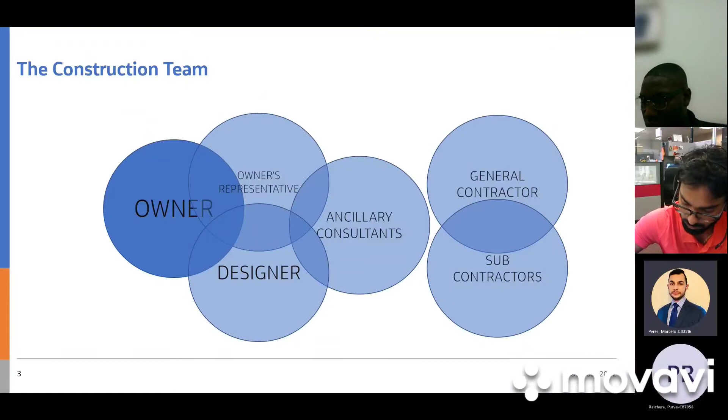There's an electrician, an IT guy, landscaper, and each of these guys is a specialized subcontractor, and the GC is just orchestrating all of them. So kind of like the owner's representative is orchestrating the whole project team, the general contractor is orchestrating all the construction team, the subcontractors.

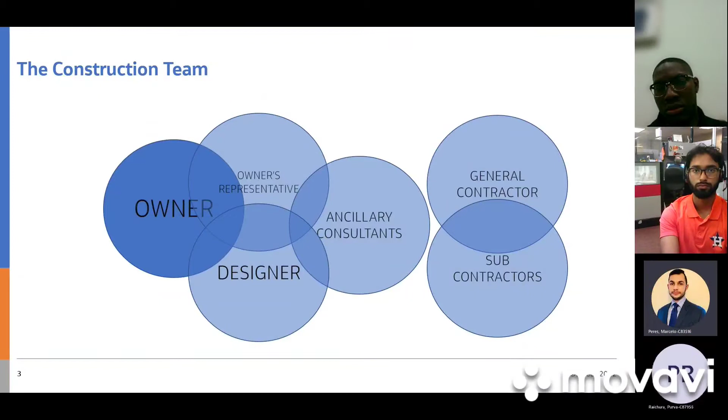Okay, so some delivery methods. There's a whole bunch of delivery methods. I'm just going to go through some of them, the most important ones, the ones that are more common in public construction. There's design-build, design-bid-build, construction manager at risk, integrated project delivery, P3, and what we call JOC, job order contracting.

And let's start with, I think just for the sake of time, I'm going to skip design-build because design-build is very straightforward. It's like when you're buying a new house from a contractor, right? One of those residential contractors. You buy that house on the plan from that residential general contractor, and he's the one designing and building the house for you, right? So you're only dealing with one person, that contractor, and he's the design-builder. He's designing and building that house for you. That's what design-build is, one person.

And then there's design-bid-build. As the name suggests, this approach has three different phases. There's the design phase, the procurement phase, which is when the owner is looking for a builder, and the construction phase. There are many pros and cons for this approach, and it would probably take us several days to discuss all of them, but here's what design-bid-build is supposed to give the owner. It's supposed to give the owner the best price for the project. Supposedly the owner gets the best price because the entire project is already designed.

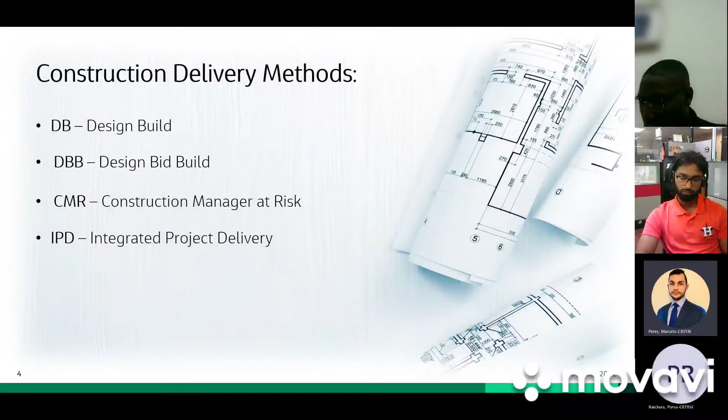So in short, this approach requires a joint contract signed between all the parties, all the entities, after the goals and objectives have been established collaboratively. And I say collaboratively because, again, these guys are all working together, all in the same boat.

And then also not very commonly used, but you will see this a lot in horizontal construction. There's what they call the 3Ps, PPP or P3. That's public-private partnership construction, 3Ps. This delivery method doesn't really have a straightforward definition, but it's basically a partnership. It's a contractual agreement between the public sector and a private sector.

So let's think of a public agency, for instance. Let's think of the Texas Department of Transportation. The Texas Department of Transportation can partner up with a private agency. And these two agencies, private and public, will collaborate with each other financially, and they will collaborate with their skills, and they will deliver a service or build a facility for the use of the general public.

These two parties, private and public, are sharing their resources, but they're also sharing the risk, the liability, and obviously the rewards. Any rewards they're sharing, right? So they're either winning together or losing together. Now, as an example, let's think about road tolls. There's a whole lot of those here in Texas, here in the Dallas area. A lot of times you see those tolls. There's a partnership between your state and a private entity.

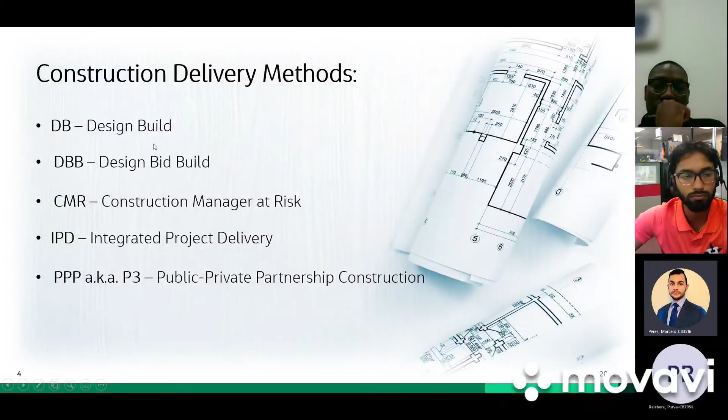So how is the project itself built on a P3, a public-private partnership? Well, this partnership can choose any of the other delivery methods that were discussed earlier, right? Let's say they want to build a highway. They can use an IPD or a CMR process or a DBB or a design-build. So they can use their partnership and adopt any of those other delivery methods.

And then there's JOC. You're going to hear this term a lot at Dallas ISD. It's generally used at a much smaller scale, sometimes with a price capped by the owner, right? A limited price. It's generally used for renovation projects or small maintenance tasks that can be easily defined by a unit cost. So the key word here is unit cost. In other words, projects that are small enough where surprises are not likely to occur.

And this is a direct contract between the owner and the general contractor or the maintenance contractor. And how does it work? The owner and the contractors interested in working for their particular entity will develop an agreement that includes a list of tasks and a unit cost associated to each task. How is this agreement developed? Well, the owner advertises a request for unit proposals, and the GCs will respond back with their unit prices. And the owner will rank the lowest bidder as bidder number one.

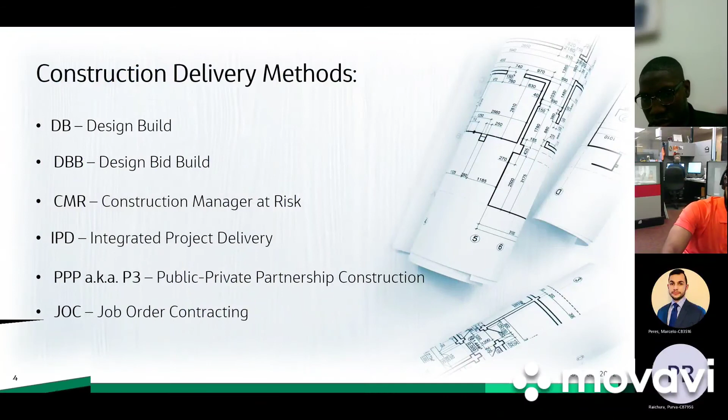So let's talk about some construction phases. Different projects, different approaches. These approaches we discussed just now bring different project phases. Each delivery method will be approached differently. But for the purpose of today's conversation, let's focus on the DBB, which is design, bid, build. Let's look at just that one project delivery method and its project phases.

So first of all, there's a need and a demand, right? Let's assume your neighborhood keeps growing, and your mayor will see the need and the demand for a new public hospital. And then the mayor will hire a consultant firm and conduct a feasibility study.

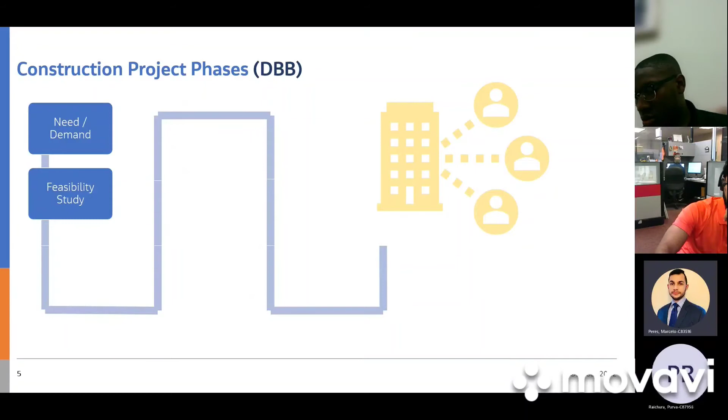Is it really necessary? Do we really need this hospital? How will this hospital positively impact the public? Does the city have a location to build it? Is that location in a buildable area? How much money is it going to cost to build this hospital? And how long will it take? All these questions are asked during the feasibility study.

And then the mayor will take that feasibility study and go find a funding source, because someone needs to pay for this project now. A lot of committee meetings with the building department and other funding sources. The mayor needs to figure out how to pay for that need.

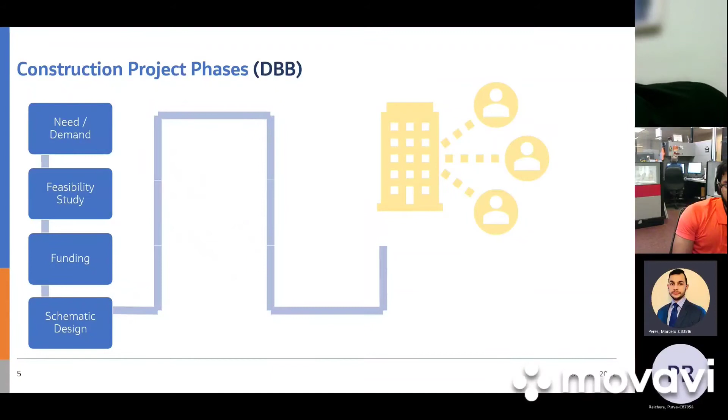And so after the mayor has established his funding source for the project, now you come in with the schematic design. At this stage, an architect is going to get hired, and he or she will draft a rough sketch of what the hospital is going to look like. This is called a schematic design. It's just to give the public an idea of what the project is all about and what it's going to look like. It's everything that was in a narrative during the feasibility study, but now translated to a sketch.

Let me just plug in my computer because it's running out of battery.

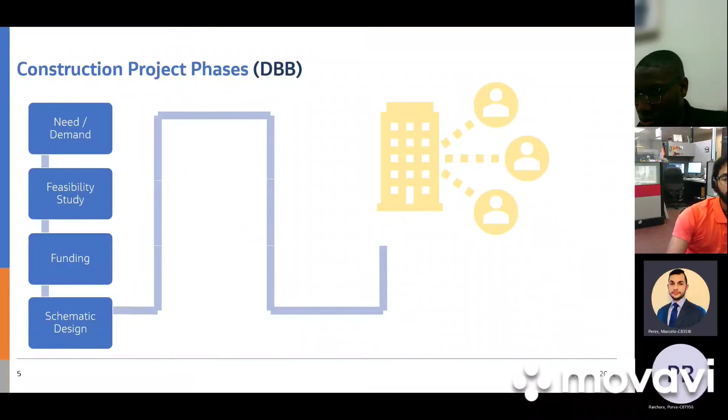Now after you've translated everything that was in a narrative to paper, there's the design development phase. In design development, you're elaborating on those drawings and you start bringing them to life. And then we create milestones. Everything here is a milestone, right? A milestone is when you meet that goal and you stop to get feedback from the owner, the owner's representatives, the stakeholders. So after design development, the next milestone is sometimes what we call the 20% construction document set.

So you stop at 20%, you sit down with the owner, you show him the current progress, and based on his or her comments or the public's comments, you can readjust, because you have several other milestones in the future. Then in design, bid, build, every time, you're always going to have a 50% construction set of documents. It's another milestone. You stop again, you sit down with the owner and the public, you show your progress, and you get feedback. And then there's always going to be a 95% construction set of documents.

At 95%, well, this is common sense, you're almost done with your design. So it's your very last chance as the owner to incorporate your comments and give the architect feedback. You had all these other milestones, all your chances to get feedback. 95% is your very last chance for feedback. And 100%, you picked up those final comments, and that means the architect is stamping and sealing those drawings.

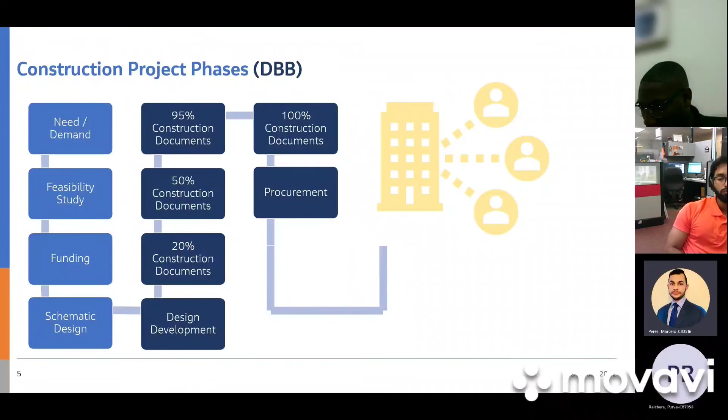And after it's stamped and sealed, it's ready to build. And then you have procurement, right? You have the set of documents. The owner will advertise this project and get bids from the interested general contractors, right? The owner will select the lowest bidder, the lowest and most qualified bidder. And then again, it takes a long time to enter into a contract with a public entity.

So, after the owner has selected the lowest and most qualified bidder, it could take anywhere from 2 to 4 months to enter into a contract with that guy. But now, let's say he's already into an agreement with the owner, the contract has been executed, he comes in and he builds the project, right? And then after the project is built, there's what we call post-construction.

I'm not going to get into details, but after post-construction, right, everyone moves in, and the facility, let's use the hospital as an example. That hospital is being utilized, and throughout the years, there's a lot of maintenance that is needed. Every now and then, there's going to be the need for renovation. The owner may or may not use a JOC system, which we discussed earlier today. So that's the live-in period of that facility.

And then the very final stage of a project is the decommission of that facility, right? And that's several years later when the facility no longer has a need, right? Perhaps everyone moved away from that neighborhood. Not always the case, but maybe this facility no longer functions because it expired its lifetime. So everything is old school. So we're gonna decommission this facility. It's basically getting rid of that facility. You stop using it, or you sell it to someone else that's interested in it, and they'll demo it. They'll build something else.

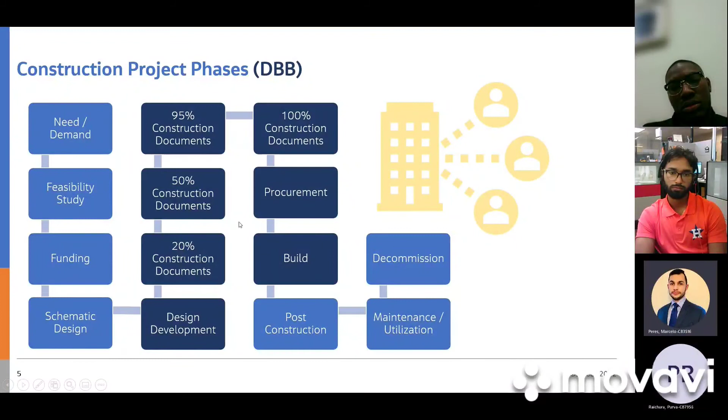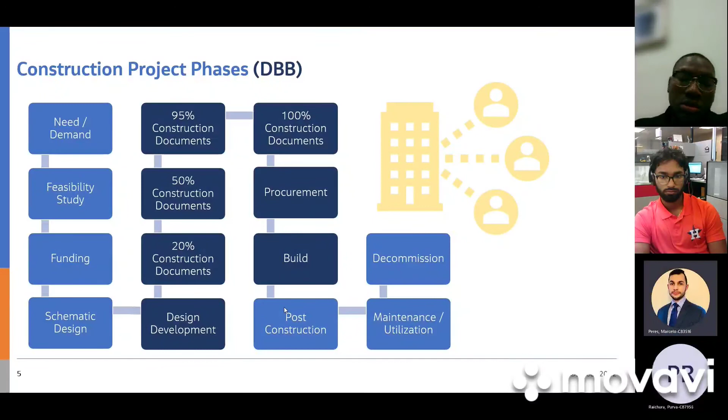And as a project manager, at no time will you be at only one single project phase. Again, you're gonna have a whole bunch of projects. So you're either under construction, some sort of design phase, or maybe you're communicating with other potential clients out there who have a need and a demand. So you want to help them establish their need, their demand, so that you can get hired and come in as either a project manager or a program manager. So that's the easiest way to put what we talked about into practice.

All right, so it's now 2:43. Let's just brainstorm together a little bit. What do you guys have? Juwanza, do you want to go first? You can actually go first. Yeah, you can go first.

Okay. I did have a quick question regarding subcontractors. So let's say a general contractor hires a subcontractor to do the lights, right? And then they mess up and it's the subcontractor's fault. So who does the owner hold liable? Would it be the general contractor since they were the ones that hired the subcontractor? General contractor, yes, sir. The general contractor.

Okay. So the owner has a direct contract with the general contractor. So if I am the general contractor, you are the owner, you are my client, and all those subcontractors are working for me. Now let's say you are the general contractor and I'm the subcontractor. You are my client. I deal with you directly, Mr. General Contractor, and you deal with the owner. So if the subcontractors messed up, something goes wrong, me as the owner, I'm going to hold the general contractor liable. And obviously, the general contractor is going to hold his subcontractor liable. Okay. Yeah. That's what I was thinking. Thanks.